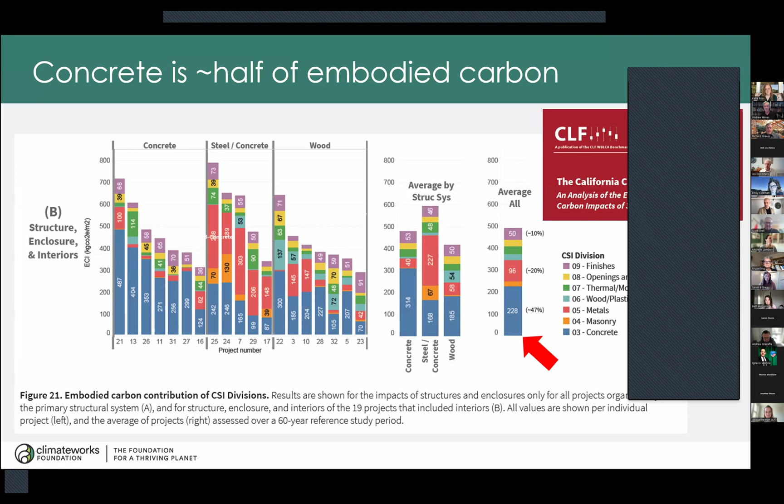Scott, we're only seeing part of your slide. Did that fix it? There's a big gray box on the right-hand side of your screen. I don't know what that's about. Oh geez, I thought I had fixed that. Now it's just gone away. We're good now, okay.

Okay, so I will stay in this PowerPoint mode just in case. Our industry program at ClimateWorks focuses on decarbonizing heavy industry, and for us that's steel, cement and concrete, and chemicals. I'm going to talk about one of those today: concrete.

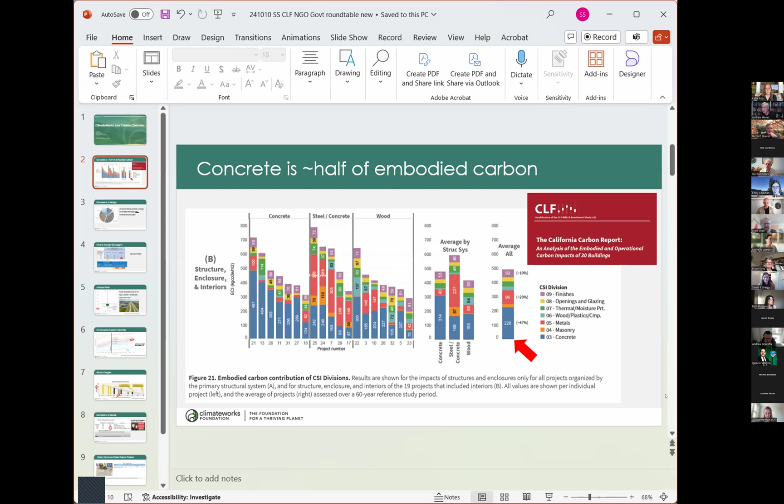Concrete is almost half of the embodied carbon in buildings, according to the fantastic CLF California Carbon Report. This is across all structural building types. Concrete is unlike other materials — it's a recipe, and we can change that recipe at your local batch plant without having to build new plants.

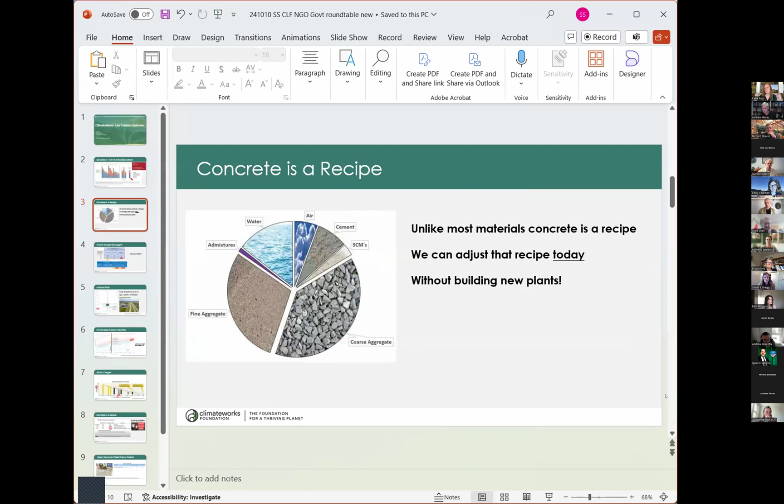The thing I want to emphasize is that everybody thinks they're doing low carbon concrete, and you have to learn your numbers. So I pick 4,000 PSI concrete as the most common strength, and kind of mid 300s — the red circles here are what you often see as benchmarks, kind of averages. And a lot of the low carbon standards tend to focus around 284 for the GSA, 313 for Marin County, and so forth.

I think we can go much lower, and I'm advocating that we go down to a target of 200 kilograms of CO2 per cubic meter. At the MnROAD project, which two years ago piloted 12 different concrete mixes, their control mix started at just above 200 kilograms of CO2 per cubic meter, and the mixes go down from there. They had a minimum of type 1L cement with 30% SCM, so they're approaching 50% clinker replacement, which I think is a good target.

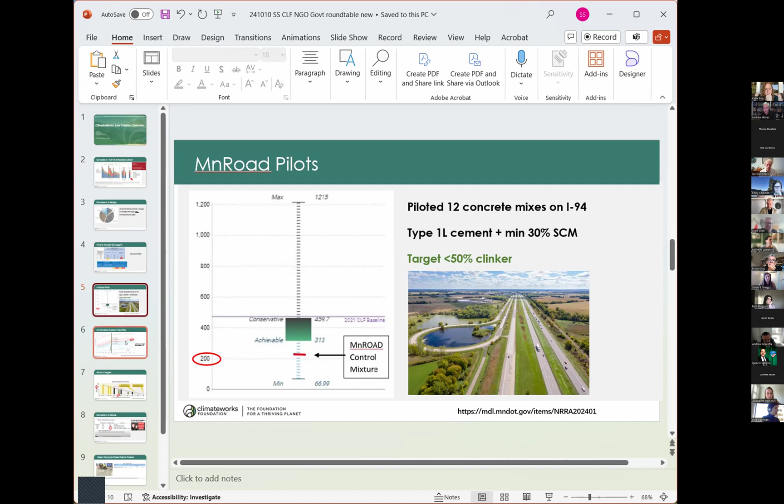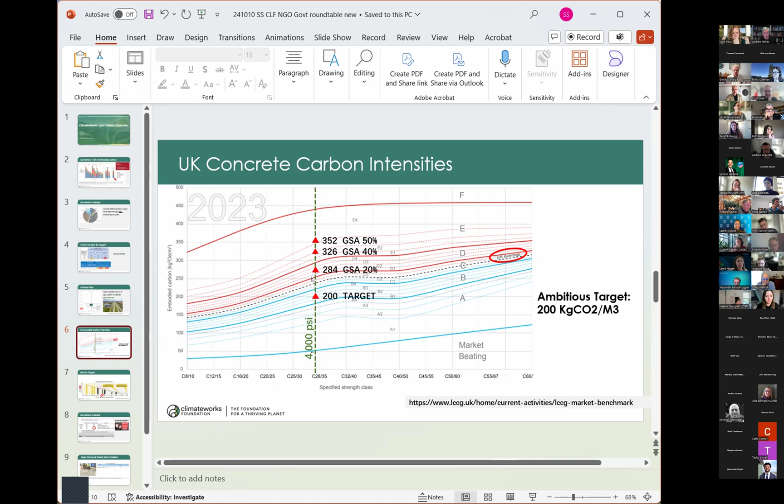If we look at the UK, these wavy lines are 5 percentile bands of actual concrete poured in the UK. That dotted line in the middle is the 50th percentile of concrete poured in the UK. So you can see at 4,000 PSI, it's about 240 kilograms of CO2. For comparison, I've put the GSA percentiles on there — the 50%, 40%, and 20th percentile. So they're well below the 20th percentile for GSA. I'm advocating to get down to 200.

The National Ready Mix Concrete Association updated their roadmap recently when they got the big EPA grant, and I've converted from cubic yards to cubic meters with these red numbers. So in 2024, they're targeting 262 kilograms of CO2, and by 2028, 196. So this is the National Ready Mix Concrete Association.

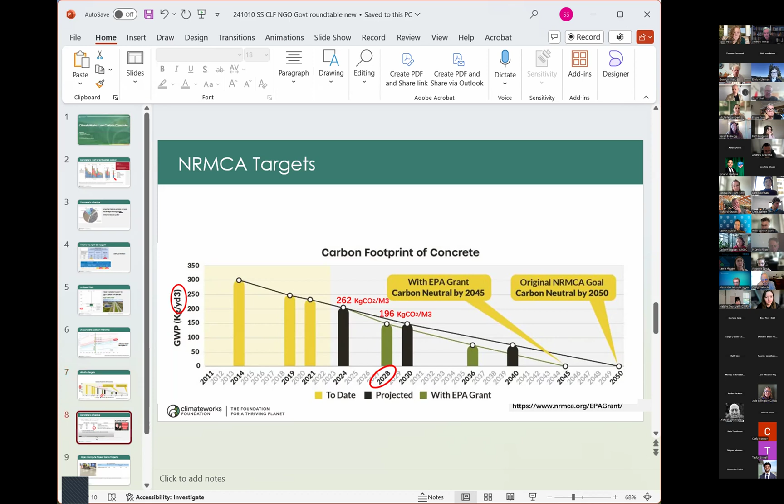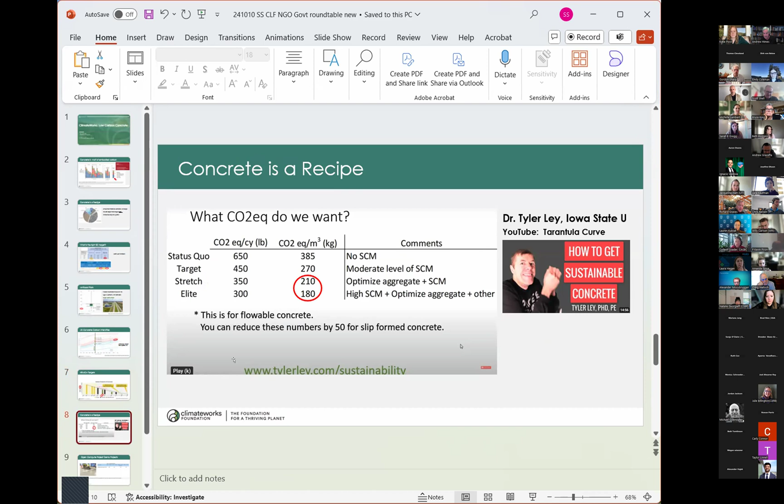If you haven't come across Dr. Tyler Ley on YouTube, you've got to Google the guy. He's Concrete Crazy Man, and his tarantula curve is definitely worth watching. He's advocating for 210 to 180 in one of his presentations.

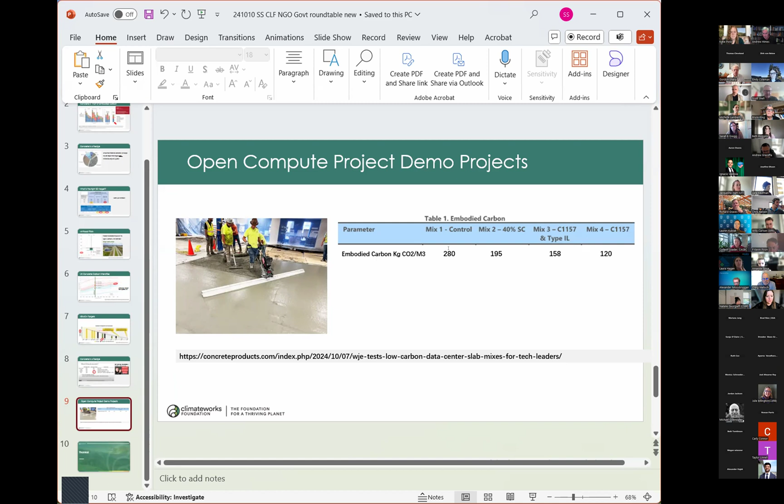They are being done today, and ClimateWorks is advocating for people to be as ambitious as possible. Thank you.

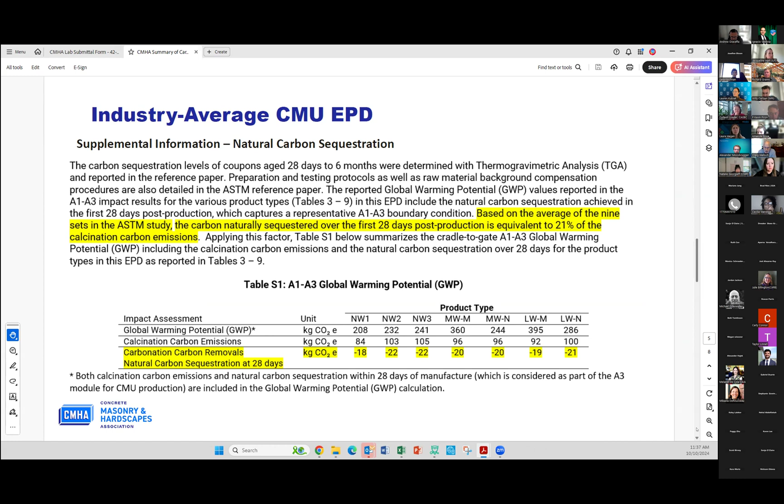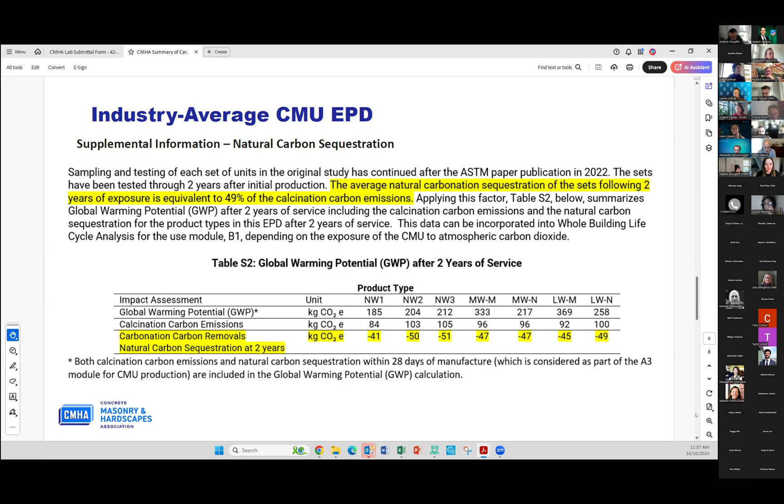Our top line numbers incorporate sequestration up to 28 days, which we consider the gate—from when you make them and stack them in the yard before they get to the job. At that point, they're absorbing about 21% of the potential calcination carbon emissions. We've included a supplemental information section in the EPD explaining that, and it also shows that at 2 years of service, for LCAs, it's equivalent to 49% of the calcination carbon emissions. So it gives you a net global warming potential. We're excited about that being out there.

We continue to do a bunch of research. We're partnering with MIT's Concrete Sustainability Hub to model our data. There are good models out there and some calculators on the CS Hub website for ready mix, but there's really not fundamental data on dry cast. So we're going to take the models and get the fundamental data for dry cast.

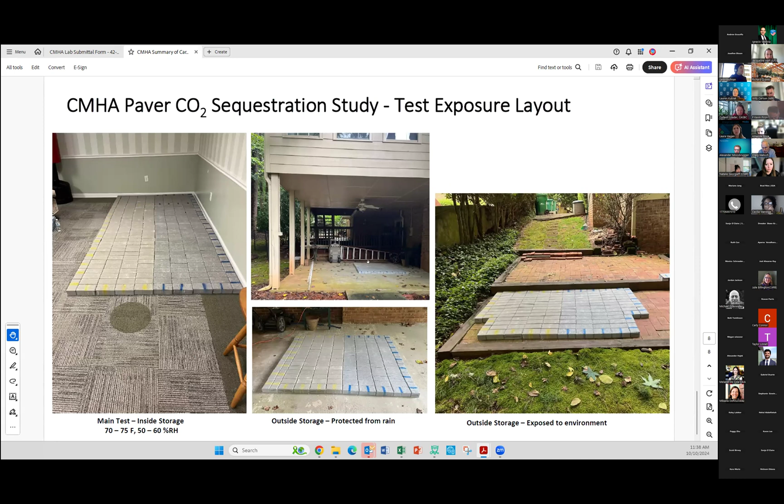We had done CMU, and now we're doing pavers. I started a project in July where we have a couple different mixes exposed under controlled shelter conditions outside, and exposed conditions outside. That's also going to be modeled by MIT. We're monitoring temperature, humidity, and carbon dioxide concentrations so we can get the fundamental models right.

We're just starting our PCR for 2025, the development of it. We're going to send out notices for who's on the committee—there'll be about 20 to 22 people on the committee. We're going to start work in November.

We're excited about that, and we plan to include sequestration and carbonation for dry cast, because we're partnering with low carbon concrete technologies. They're very much into dry cast because we have the open structure and the chambers we cure in—it's ready made for these new technologies that carbonate or use new materials that carbonate during curing. We'll include all that in the PCR for doing EPDs, and look at all the boundary conditions around that. If you're using waste CO2 or whatever source you have, take that in, but also all the losses and everything you have to deal with to get the right accounting on that. We're excited about doing that.

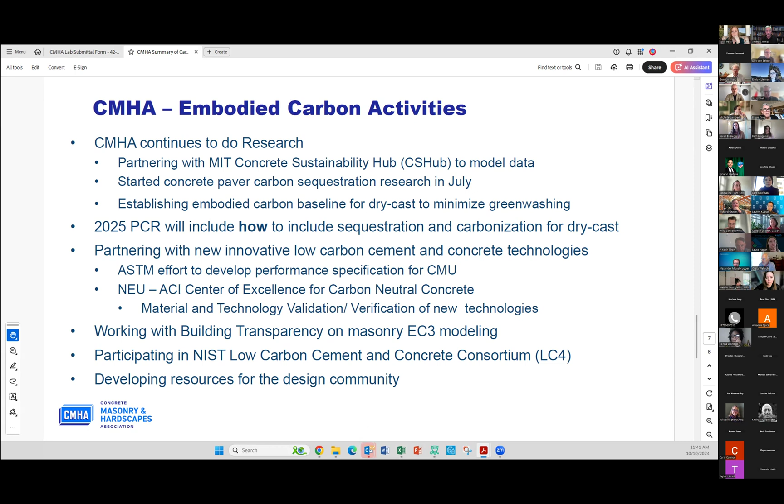I am sharing some of the highlights from a 2-year collaboration with Climate Positive Design and Architecture 2030 that just wrapped up. We produced a host of new and updated tools and resources as a result. We haven't even sent out our official announcement about these yet, so you all are getting a little sneak preview.

A few of the highlights include a climate action planning for the built environment framework that we developed by taking basically every climate action plan and climate action planning document out there that we could find related to the built environment. We consolidated that into a comprehensive but pretty straightforward 10-step climate action planning framework applicable to any building sector professional, focused on meeting not just mitigation but adaptation goals as well. I will put the links for all of these in the chat when I'm finished.

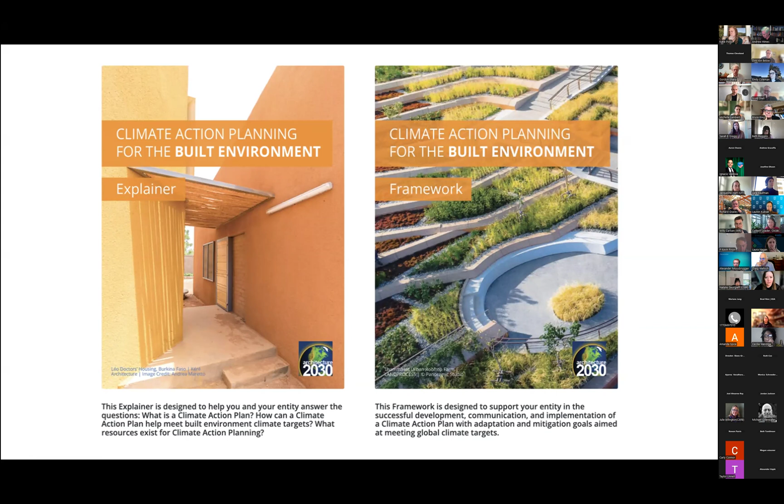The second thing we just published, and I'm really excited about this one, is a decarbonization framework for planning, landscape, and infrastructure. It's really focused on beyond the building—the exterior built environment—and on reducing embodied carbon specifically.

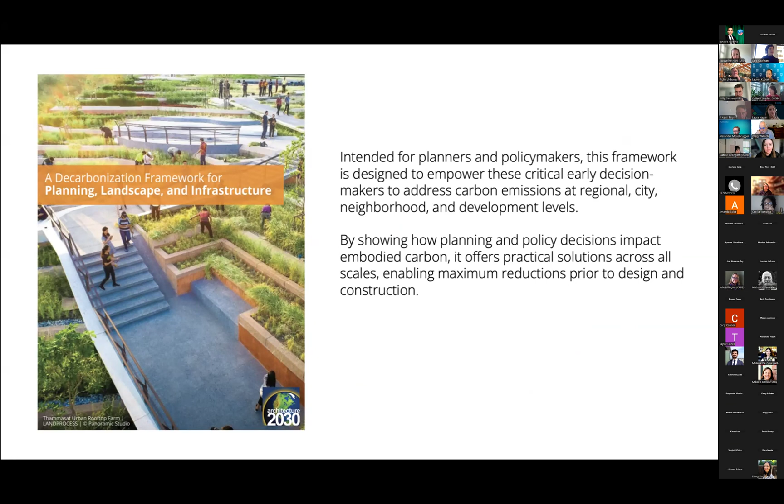I'll give you a little preview of what's in it based on the table of contents. It's a framework for comprehensive exterior built environment decarbonization through the planning and policy lens. We've framed it around should we build, how much should we build, where should we build, and how should we build.

Each of these sections comes with existing policy precedents. The whole framework has about 35 existing policy precedents that people can build on to implement these decarbonization planning and policy mechanisms. Another highlight is that for those familiar with one of our oldest and most loved tools, the 2030 Palette, we collaborated with Climate Positive Design to create a host of new swatches for the 2030 Palette.

A little snapshot, we added ones like afforestation and coastal seaforestation drawdown to really expand the palette beyond the built environment to be looking at landscapes and infrastructure and planning, which all have a heavy embodied carbon focus. And that is it.

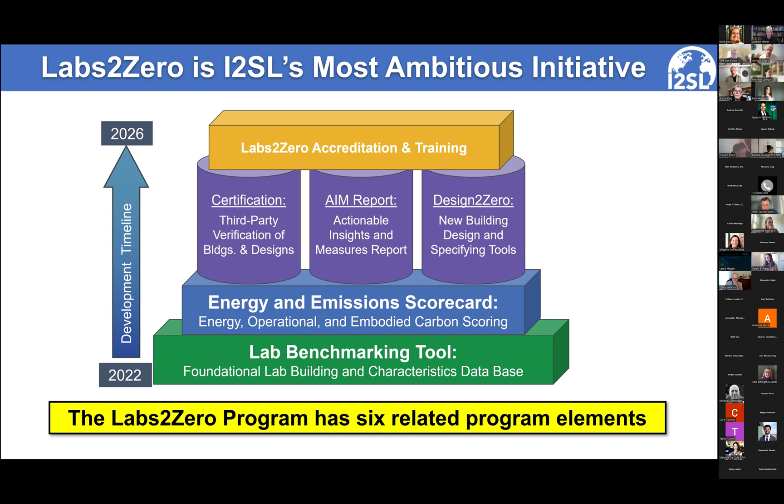We're then going to be certifying those scores. We're going to be adding training to it. And then we have a very unique thing, which we call the AIM report and Design to Zero, which are basically like automated level 1 audits to help people understand how they can decarbonize their laboratories with various measures to cover both energy, operational emissions, and eventually also embodied carbon.

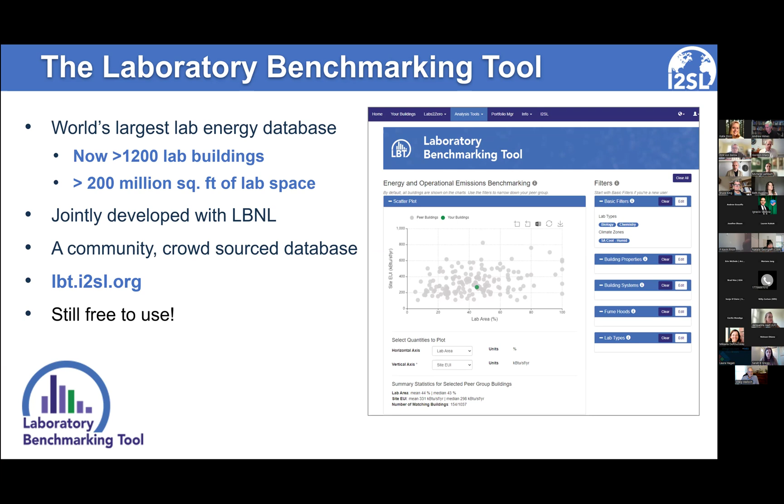So the laboratory benchmarking tool is the world's largest lab energy database. Now we've got over 1,200 lab buildings in there, over 200 million square feet of lab space, something we developed in conjunction with the Lawrence Berkeley National Laboratories. It's a community crowdsourced database, so you can enter your data in there, and then on a periodic basis we'll go through, anonymize the data, and add it to our peer database so you can compare your buildings against other buildings. It's free to use—I'll put the URL in the chat.

One of the recent developments was adding embodied carbon. So now we can also benchmark not just operational energy or emissions, but also embodied carbon. What we're trying to do is collect enough data that, in addition to benchmarking, we'll also be able to give a score—again, like a 1 to 100 percentile-based score—indicating how you're doing in terms of embodied carbon versus your peers. This is pretty exciting. I don't think anyone out there is doing any embodied carbon benchmarking or scoring. Obviously this is definitely for laboratories, but perhaps for other buildings as well.

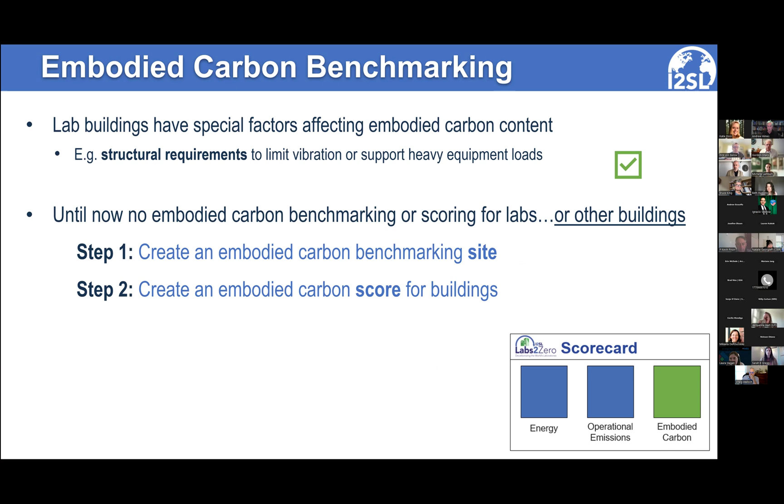So with that, I'm going to turn it over to Dirk, who's going to talk more about the embodied carbon benchmarking. Yeah, good morning, we're excited to be here. We wanted to share that we got some good interaction with Brad Benke from CLF to build up our schema for this new expanded database. Obviously, we're asking architects and owners to provide LCA data and project information.

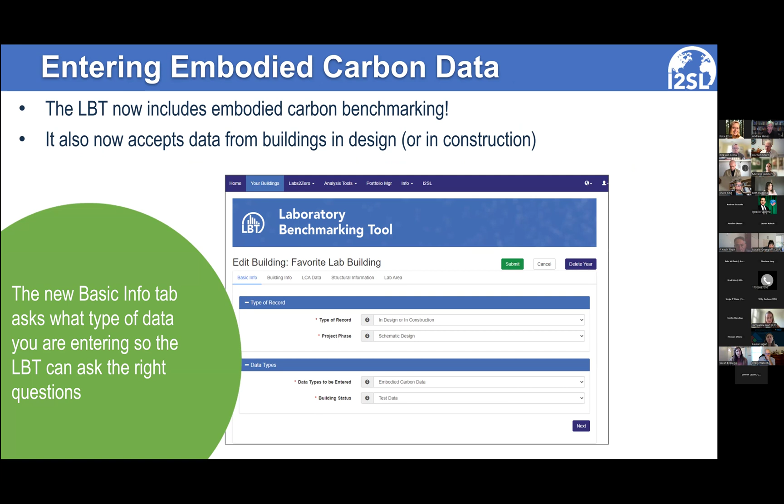If you go to the next slide, Gordon—the one big focus we have is really to look at structural information. We're looking very carefully at how the structural design drives laboratory design. You may understand that laboratories often have very stringent vibration restrictions and other heavy loads that need to be supported by the structure, which really increases the amount of carbon in the concrete and steel applied in these buildings. So we're really trying to understand how we can help architects, engineers, and owners drive down these loads, improve the design, make them more efficient, and reduce the weight of the buildings.

Next slide. The LCA technologies that we use are really very similar to LEED and also what CLF prescribes. We're really excited to learn about the new schema that you guys developed, and we'll be looking carefully at that and trying to harmonize our databases together.

Here you see a first view of how many labs we have—about 55 laboratories that provided LCA data, and we really hope to reach more people to know about this and use the benchmarking tool. Again, as Gordon said, it's totally free to use, and there's a lot of support around it that you can request—we'll be glad to help you. So thank you very much for inviting us and having us today. This was a wonderful opportunity, and spread the word.

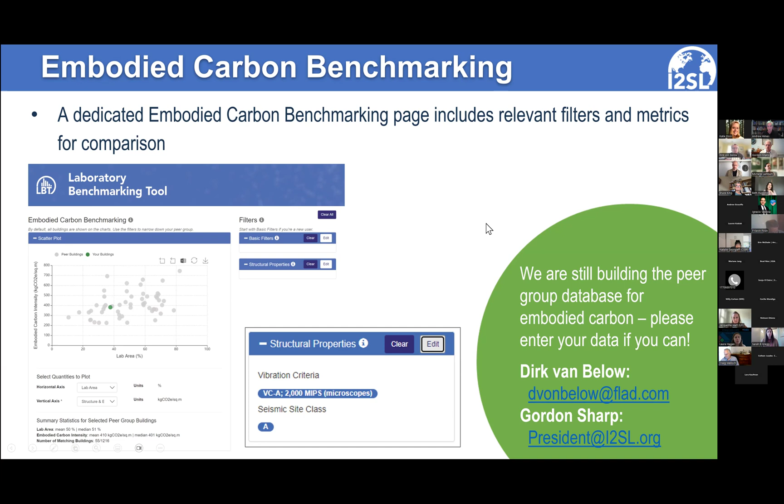Thanks much, Dirk, I really appreciate that. One quick thought about what you just said regarding the intention of your organization and the tool to align with the categories listed in the data schema published by the ECHO project. That's a perfect example of what we hope will happen across the industry as people come into alignment from a wide variety of organizations and initiatives addressing embodied carbon. So thank you for that.

The next person on our agenda is from the Minnesota Buy Clean Task Force. Richard had to leave early, but Natalie Georgieff is here with us. Do you want to take it away, Natalie? Sure, let me share my screen. Natalie Georgieff, close, okay, great. Yes, thank you.

Hello everyone, I'm Natalie Georgieff, a researcher at the University of Minnesota Center for Sustainable Building Research. I'll be speaking on behalf of Richard Graves, director of the center, about Minnesota's progress in Buy Clean. Minnesota is one of several states part of the federal Buy Clean partnership, and as we work on implementation of our program, we're excited to coordinate and align with everyone else working on embodied carbon and Buy Clean.

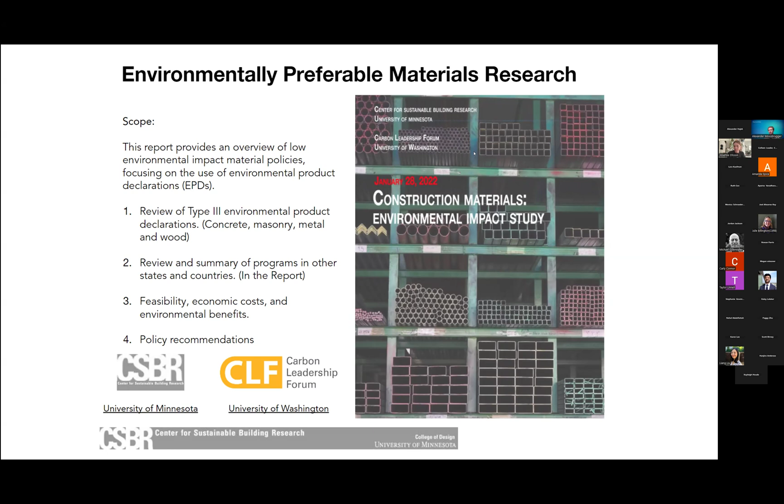I'll also touch on Minnesota's B3 guidelines, which have been around for, I believe, 20 plus years. B3 stands for Buildings, Benchmarks, and Beyond. Originally the dream was to be able to benchmark buildings, but as we all know, that's easier said than done, and there are a lot of challenges, especially because the B3 guidelines' LCA requirements have several different pathways.

Anyways, we have over 400 plus projects, and these are all projects that are funded by general obligation bonds. So any new construction or major renovation that's funded by general obligation bonds is required to follow this program. And it goes from pre-design all the way through 10 years of building operations.

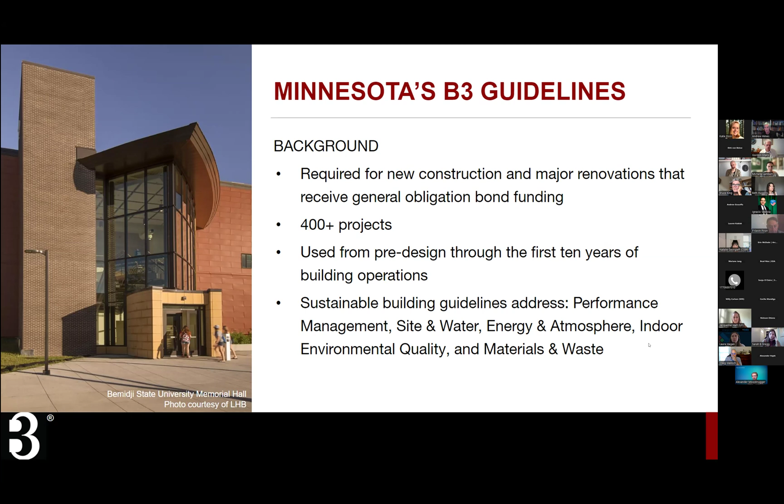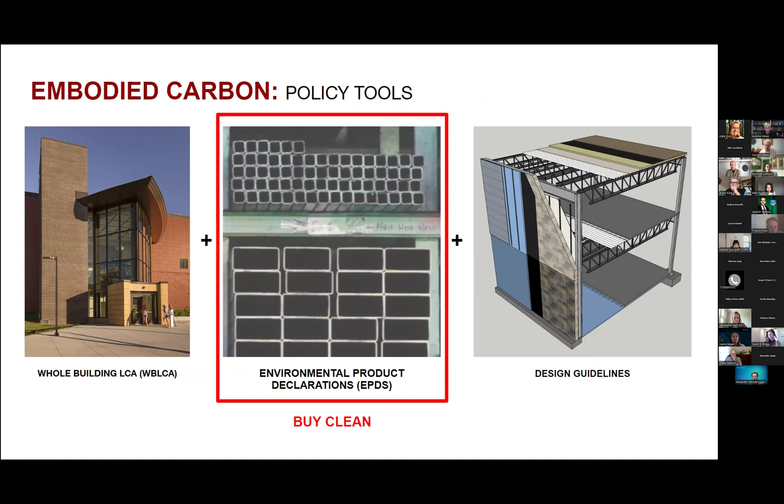And right now, the policy is focusing on EPDs, but we hope to have a more comprehensive embodied carbon approach as we move forward, including whole building LCA. Design guidelines and EPDs are kind of the first step, hopefully, in establishing some way to compare embodied carbon between buildings or between materials as a start.

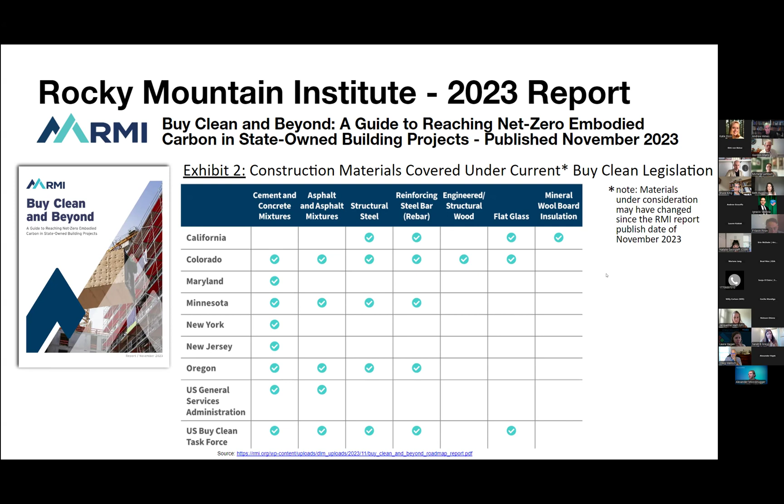And then finally, as a part of our other materials working group, we're putting together some studies and analysis for different options for building bays to try to hone in on what the biggest materials are in terms of embodied carbon impact in some of our typical building types. So yeah, more to follow. There's a lot in development, and yeah, thanks for having us.

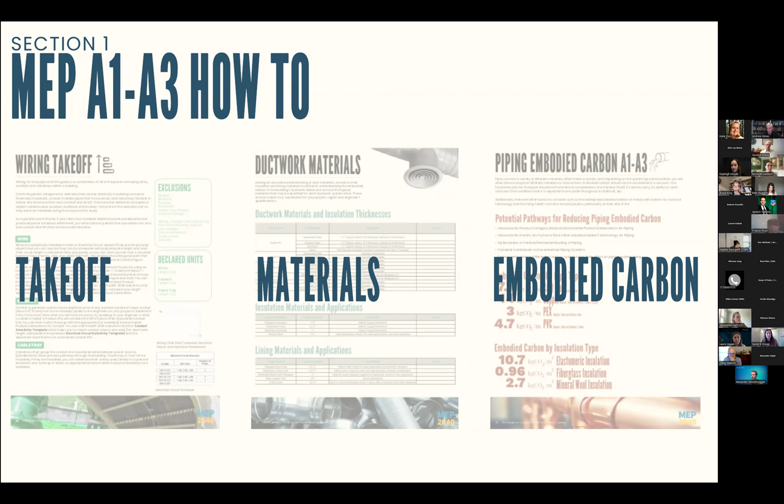And then looking at the case study that we're using here, trying to establish functional equivalence between buildings, because if you're designing a building in San Diego versus Chicago, you would have a really different functional equivalence between those buildings. Building a lab building versus building an academic building, you'd also have really different expectations in terms of what the whole life carbon might be.

Also displaying what those whole building results are. We actually walk through that A to D, but you'd see that in the case study for A1 to A3, and then breaking down M versus E versus P, FP - what those results are.

And then walking through A4 through D, how to do that stage by stage, how you'd go about the calculations, having easy to understand methodologies around that, because some people may not have ever done a refrigerant calculation for B1 before. And then looking at replacements, because MEP systems are not just an upfront problem. You replace those systems 2 to 3 times throughout the life of your building. So actually all of that upfront embodied carbon doubles and triples sometimes throughout the life of your building. So really consolidating all of those industry references for you.

And then we end the report with some calls to action around getting more EPDs, better EPDs for MEP, and just looking at the number of EPDs you need to have. A call to action around getting more benchmark studies. We looked at one case study in here, and it's not enough given the lots of different MEP systems and buildings. And then a call to action around MEP being included in certifications and policies around the US.